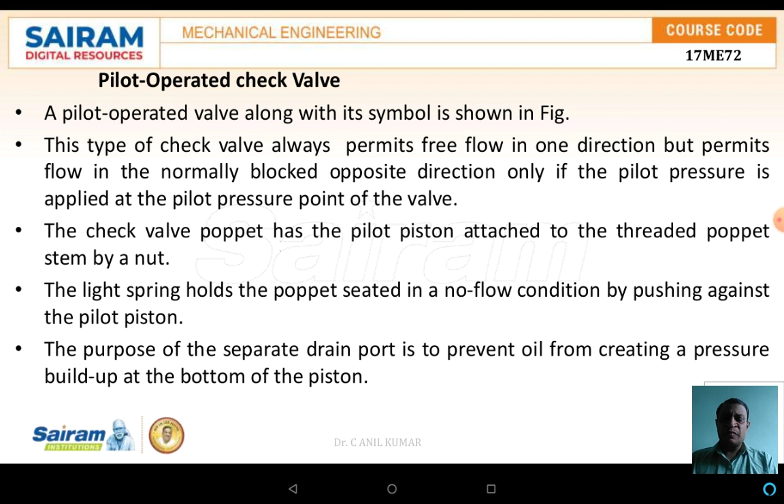The purpose of the separate drain port is to prevent the oil from building up pressure at the bottom of the piston. The schematic diagram shows the pilot operated check valve. Here, on the left side, the plunger type sketch represents the pilot. That pilot pushes the poppet valve. The poppet valve is held by means of spring pressure.

The first one is where no pilot signal is given. Here the fluid flows in a continuous way, where the pressure is applied on the poppet, and afterward the poppet is in the open condition.

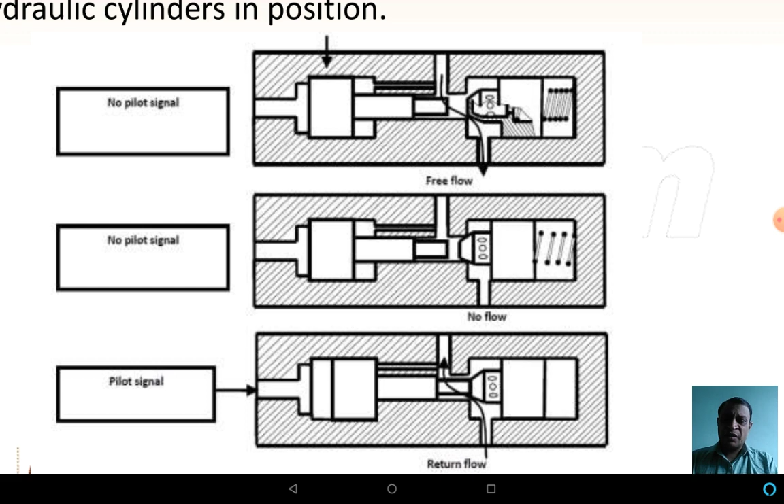In the second schematic diagram, the poppet is in the closed position, and the pilot is away from the poppet, so the gap between the poppet and the piston or pilot is maintained. In the third sketch, the pilot pushes the poppet, by which the opening automatically takes place. Once the opening takes place, the fluid starts flowing through the passage. Here the passage is created to avoid pressure building in the system.

To have a continuous flow, either in the forward direction or in the reverse direction, the pilot will help the fluid to move in either the forward or the reverse direction.

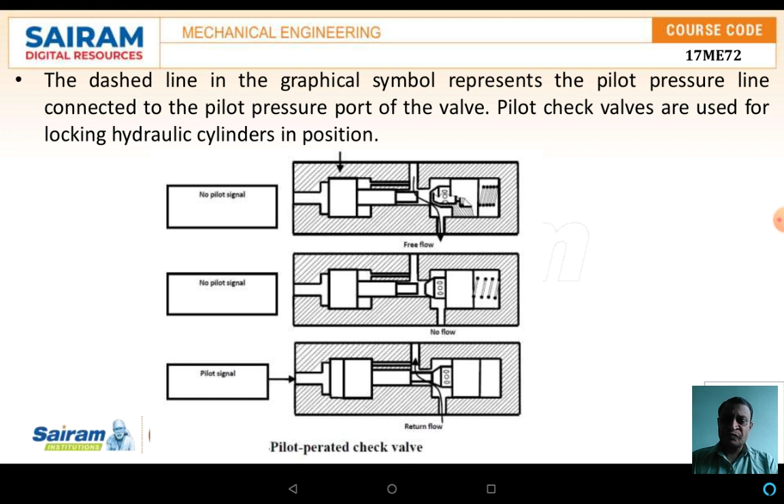The next one we are discussing is the shuttle valve. A shuttle valve allows two alternate flow sources to be connected in one branch circuit. The valve has two inlets, P1 and P2, and the outlet A receives the flow from the inlet at higher pressure. The figure shows the operation of the shuttle valve.

If P1 is greater than P2, the ball slides from left to right and blocks P2. And if the P2 pressure is more, the ball slides and blocks P1, making the flow go to A. If pressure P2 is greater than P1, the ball slides left and P2 supplies the flow to the outlet A.

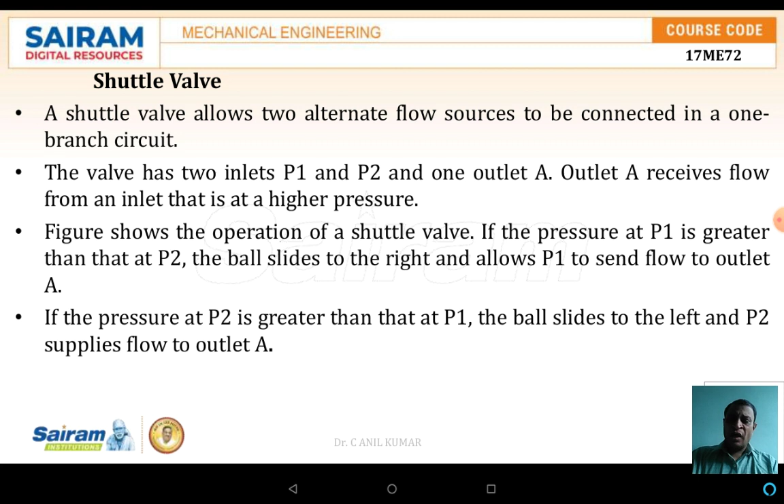One application of the shuttle valve is to have a primary pump inlet P1 and a secondary pump inlet P2 connected to the same outlet A. The secondary pump acts as a backup, supplying flow to the system if the primary pump loses pressure. The shuttle valve is also called the OR valve, because it receives the pressure input signal from P1 or P2, causing the pressure output signal to be sent to A.

The graphical or symbolic representation of the shuttle valve is also shown in the figure, where it is a Y-shaped symbol along with a circular ball. That circular ball can be moved to the left and to the right, and the opening port is represented by a vertical line A. This schematic diagram shows the shuttle valve. In the shuttle valve, there is a ball with two ends.

The one is nothing but the P1 as well as the P2, both are the inlet, and A is the outlet. If the P1 pressure is more, the ball is pushed from the P1 point to P2 and it is blocking the P2, and the flow is from P1 to A.

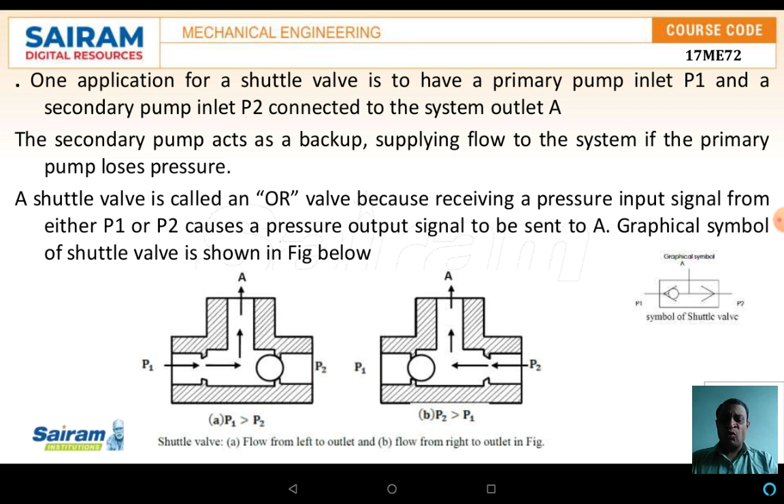The same way, if the pressure is more in the case of the P2, the ball is pushed from P2 to P1, and it's blocking the flow in the P1, and the direction of the flow is open for P2 to A.

The next one we are discussing is the pilot operated DCV valve or pilot operated check valve. The pilot operated check valve can permit the flow in both directions in normal operation. It functions like a check valve, allowing free flow in one direction and blocking the flow in the reverse direction. To achieve this function, the pilot piston is attached to the main poppet. The poppet is kept normally in a closed condition with the help of a light spring.

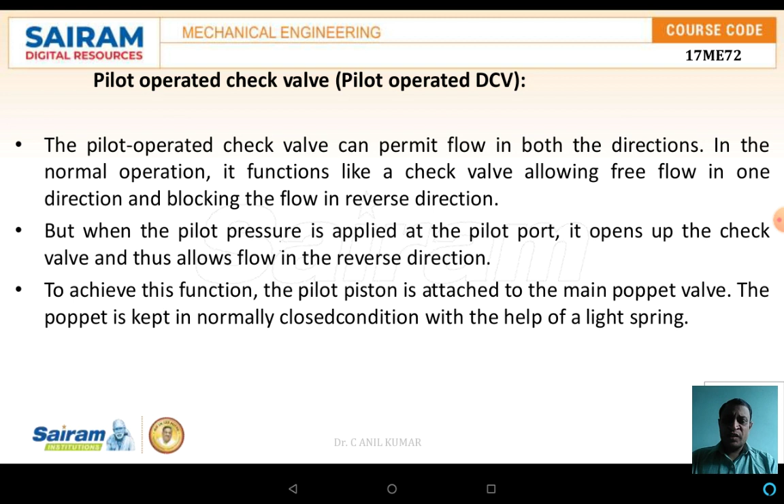See, this one is a pilot operated DCV valve. There are two ports. One is pilot pressure operated, where a spring and piston will be there, and a drain will be there. And the second opening is something like a check valve, where the free flow direction is to A; if the valve is opened by the pilot pressure, then only the flow normally takes place, or if not, the flow is blocked. The symbolical representation of the pilot operated DCV valve is as shown in C.

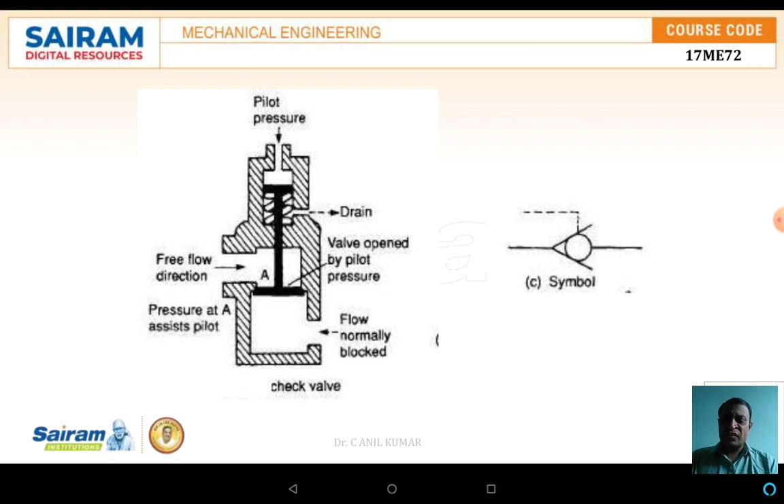The sliding spool valve. The spool is a stepped machined cylindrical member having 2 to 3 lands. It is something like a stepped shaft. The lands are machined to a close dimensional tolerance and will have a sliding fit in the bore of the valve body. The opening formed between the land and the spool acts as a flow passage between the connecting ports.

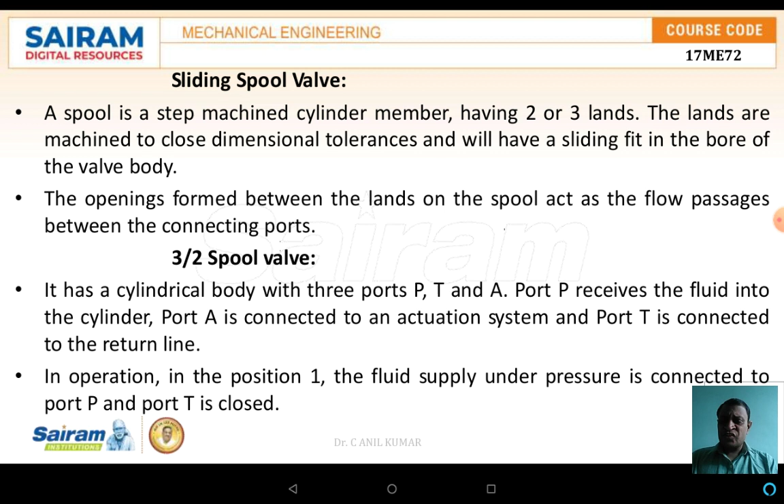3x2 spool valve or 3 port two-way spool valve. In this cylindrical body with the 3 ports P, T, A, the port P receives the fluid into the cylinder, the port A connects to an actuation system, and port T is connected to the return line. In operation position 1, the fluid supply under pressure is connected to P, and port T is in closed position. That means the pressure now flows through port A and activates the device connected in the line.

When the spool is moved to position 2, the port P is closed, thereby cutting the supply while the port T is open. Since there is pressure in the line through port A, the pressure is relieved through the open port T, and fluid freely flows out to the sump, or to the tank.